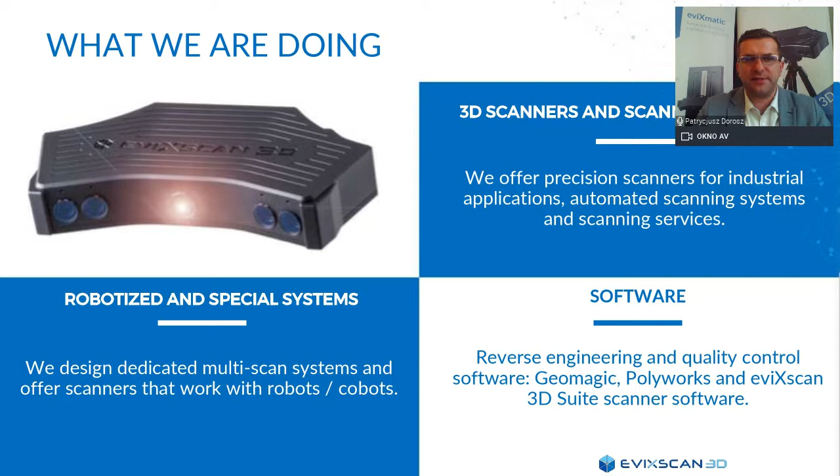What we are doing: we have today three fields of activity. I will not talk in details about our electronic design services and other company activities, but we focus today on the 3D scanning business part. So 3D scanners and 3D scanning services. We offer precision scanners for industrial applications, automated scanning systems, and scanning services. We also offer software, reverse engineering and quality control software Geomagic, and also Polyworks, and eviXscan 3D Suite scanner software, the new release, which was released a couple of weeks ago, called eviXscan 2.7. We also work in robotic fields, and we have robotized and special systems thanks to several partnerships. We design dedicated multi-scan systems and offer scanners that work with robots and cobots.

eviXscan FinePrecision scanner. So we would like to show you today our new product, which was developed thanks to our R&D engineers last weeks and months. And right now we have finally delivered it to the market.

A couple of technical and marketing information about this product. So eviXscan FinePrecision scanner is a device based on the latest generation of highest speed cameras with CMOS matrix and blue light source made in LED technology. So we are using here the blue LED light technology. FinePrecision scanner is a perfect measuring tool for precision mechanics, especially in areas such as production of turbine blades, microcircuits, small injection parts, precise numerically processed elements. It's also very good to use in scanning of implants and prosthetics, watchmaking, jewelry, figures, statues, gaming industry, generally all objects and details that are very small and require precise scanning and measurement due to their size and complexity.

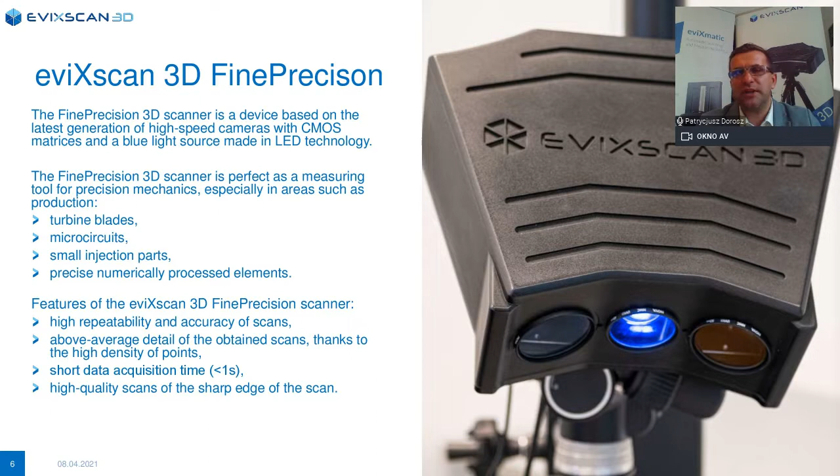Short data acquisition, as I said before, and high quality scans of the sharp edges of the scan. So when we scan some small part or component with this unit, we are getting very sharp and raw scan data from the first place. And inside our software, eviXscan Suite 2.7, we are not using any smoothing functionalities or over-smoothing to polish the edges or the surfaces. So you get the data exactly as you scan it, straight from the first place.

A couple of technical data, specifications and information about this device. As I said before, we are using a blue LED source. The unit is featured with two 8.9 megapixel cameras. Scanning time is 1 second per shot.

Measuring range of this device is 120 by 60 by 45 millimeters. This is the field of view in which we are obtaining the accuracy advertised here, but it doesn't mean this is the maximum or minimum size of the scanning object. After several tests done by our engineers, we are able to get objects which are even 2-3 millimeters in size scanned with high accuracy data.

Maximum object which could be scanned by this unit is up to 30-35, maximum 40 centimeters. Obviously, if we are scanning an object bigger than the measuring range, we need to make a few more scans and merge them afterward inside our software, which is also a fast and automated process.

Density points of this device is 1,233 points per square millimeter, so very high density points and very high precision data. Accuracy, we are achieving up to 6 microns, so it's significantly improved versus the other scanners in our product line, HD Optima and particularly HD Quadro in a range, which have 13 microns of accuracy. Here we are achieving 6 microns.

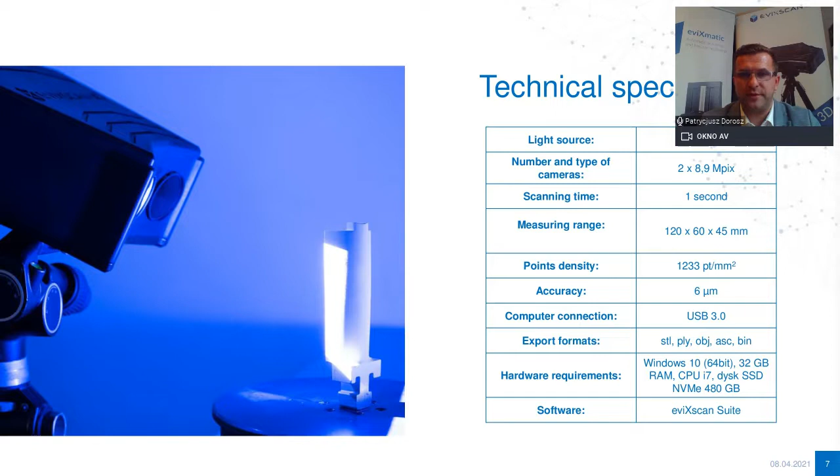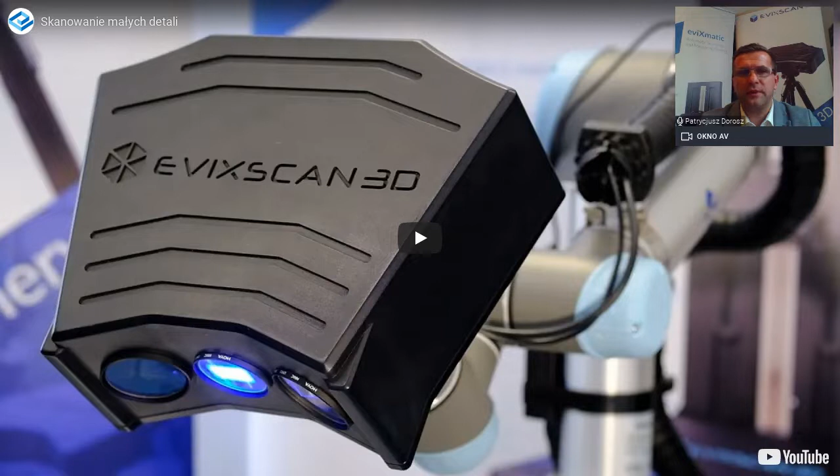Here you will see some very interesting footage of the new scanner, FinePrecision, which is mounted on a universal robot arm. As you know already from the last couple of weeks, we have tightened our collaboration with Universal Robots, and as an off-the-shelf product, our heavy-duty Optima scanner could be implemented, but also FinePrecision can be mounted on the robot arm UR5.

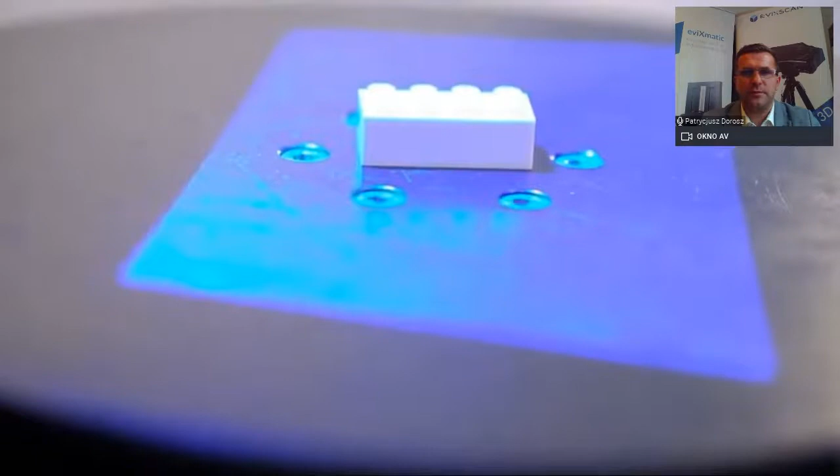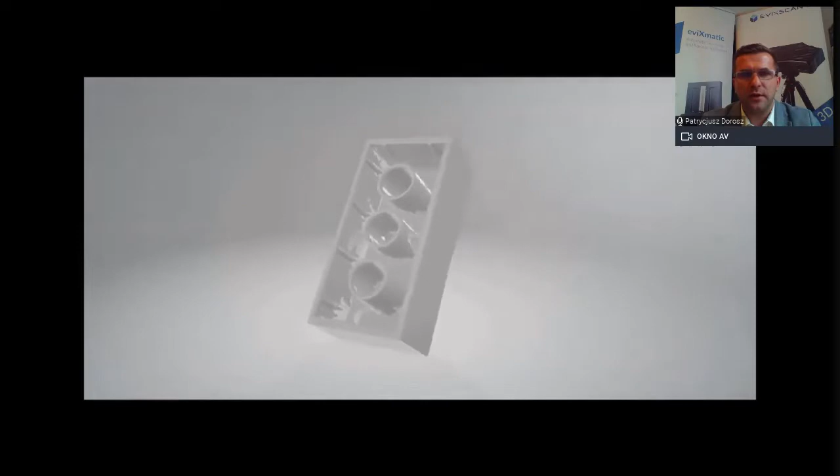Here, particularly, we are scanning an application of a Lego brick from the famous Danish company Lego from Billund. A small Lego brick is put on the 20-kilogram rotary table, which is included with each scanner and system. On the screen, you can see how precise the scanning data is. And here you have the 3D PDF as an STL file, where you can find the details and sharpness of the model, how accurately the Lego brick is scanned by this unit.

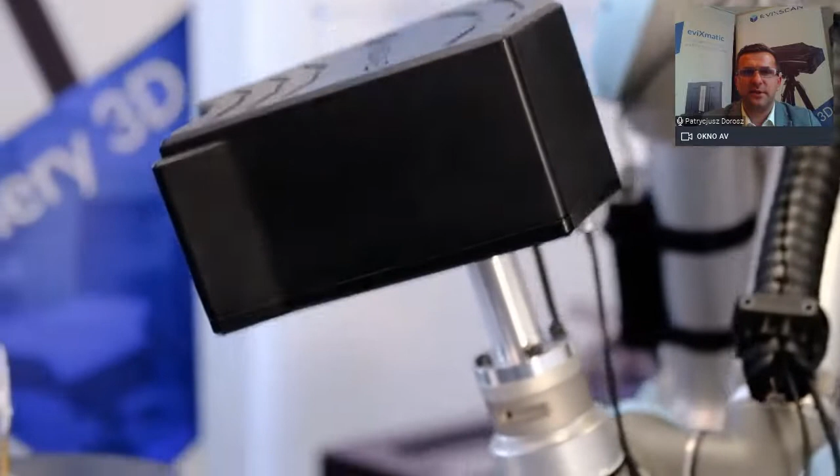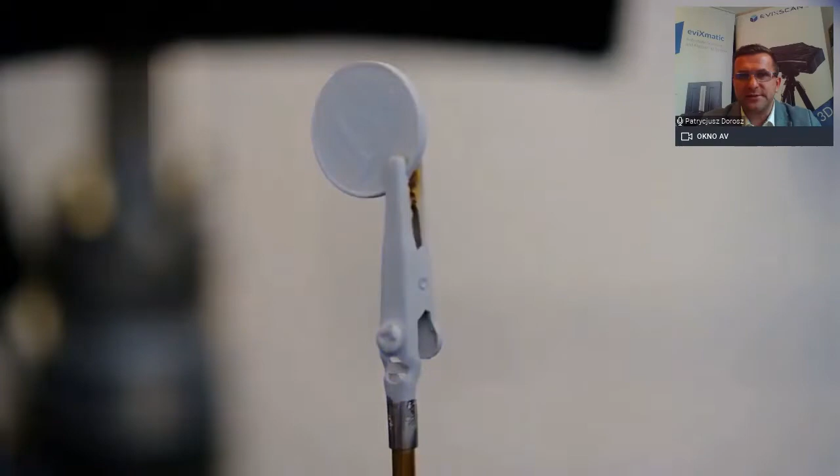The next application, also the same product, same scanner, same robot, is a €1 coin. This is a very good example because a euro coin is very small, very shiny, and has lots of details and engravings on it. We are using here a specific handler to handle the coin, to scan it in a more automatic way without manual user operation, without physically touching and changing the coins. You can see how the scan data looks like and how the STL file looks like after scanning.

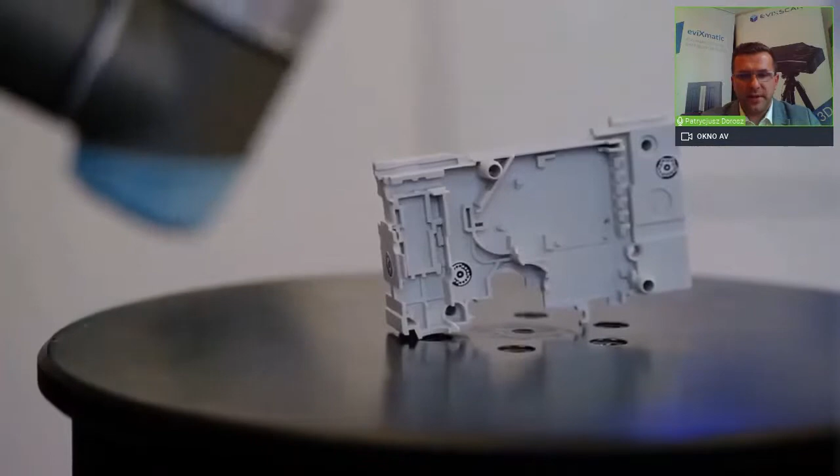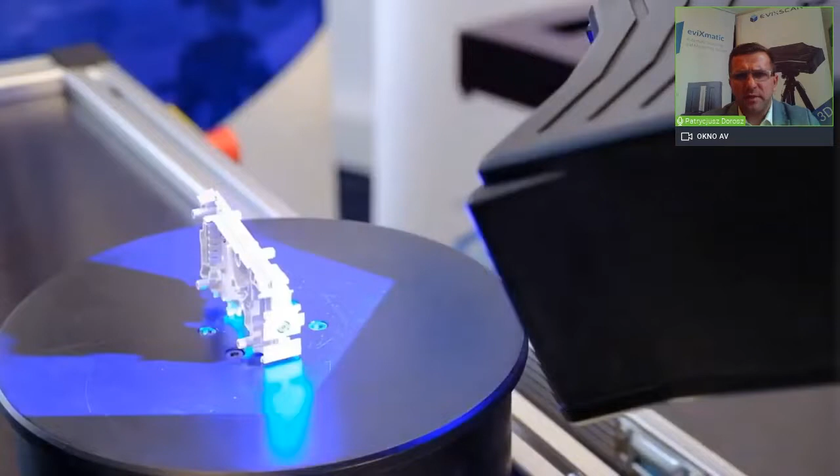The third application is also a small component, a plastic component. It's the housing of a molded case circuit breaker. You can see how complex and complicated the model is. It's a couple of centimeters, 3, 4, 5 centimeters maximum in length. And HD FinePrecision is scanning this object.

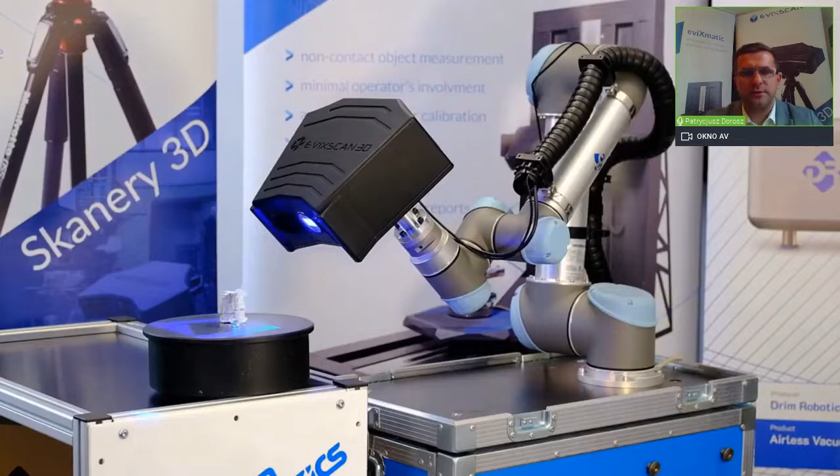You can see how fast our cameras are scanning the object, how fast we expose the blue lines on the object. It's a 1 second scan. Nicely, the UR5 robot is moving the scanner around the model, so you don't have to perform any manual operations or movement. Obviously, the rotary table is helping us a bit too.

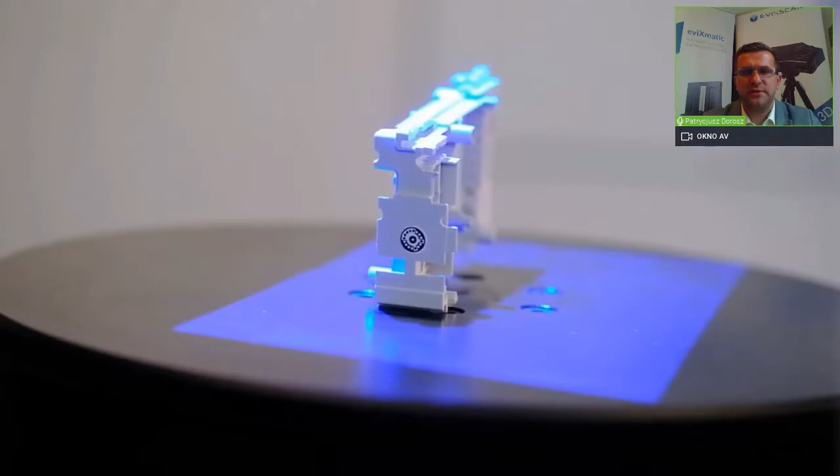On the model, you can see our smallest unique marker, a coded marker, which helps us to more quickly pre-align the scan data to a ready STL file. Here you can see the result as scan data, and here the STL file. Please take a look at the edges and the specific complexity of the model.

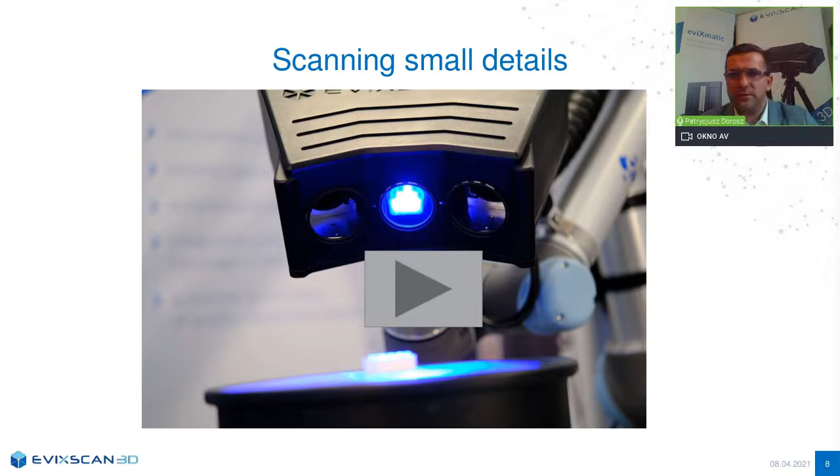All right, so we are behind the movies. Robotized systems.

Now I would give a hand and voice to my colleague from Universal Robots, Karol, who will present you Universal Robots company and the product line and tell a little bit more about this application. So Karol, the stage is yours.

Thank you very much, Patrycjusz. Welcome everyone, whenever you join from, good morning, good afternoon, good evening. I'm pleased to present to you Universal Robots company, which is the biggest cobot manufacturer. During my presentation, I will try to answer the question of how it is possible to turn your business from uncertainty into competitive advantage, and I hope at the end we'll find the answer.

Before we start, let me present myself. My name is Karol Habryka. I work in the regional technical support in Central Eastern Europe, as an application engineer with main responsibility for Poland and Baltics. My background is industrial automation. For many years I've been connected to robotics, and in this field I feel I have the most experience.

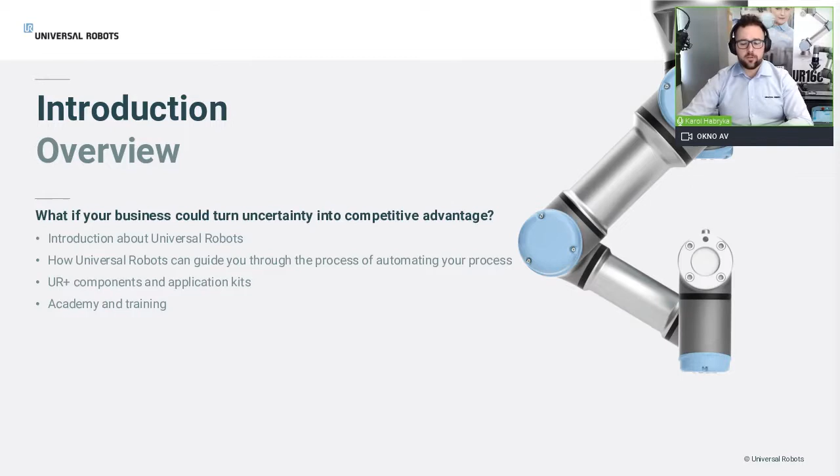Finally, we will talk a bit about the Academy and possible trainings, and how you can build up your competences in terms of using robots in your company.

So let's move to a few words about Universal Robots. Universal Robots started working on developing the collaborative robot arm in 2005, and that year the company was established. The first robot was produced and provided to the market between 2008 and 2009, and this robot is being presented on this slide. For your information, this robot is still working, still put into operation. It's working with a CNC machine. And from that time, we have provided more than 50,000 robots worldwide.

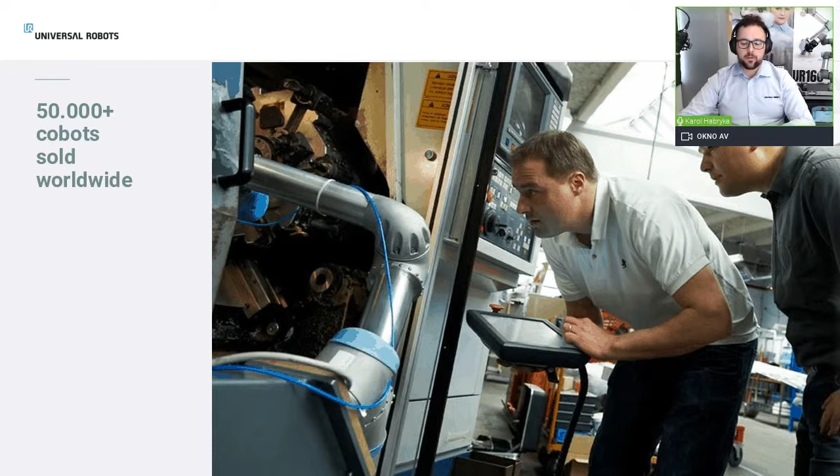During this short period, a bit more than 15 years since the company was established, the number of robots is quite high. Being a collaborative robot manufacturer, it's not possible to avoid comparison to traditional industrial robots. Collaborative robots are also industrial robots, but just to differ from each other, I would like to call one industrial and the second one collaborative.

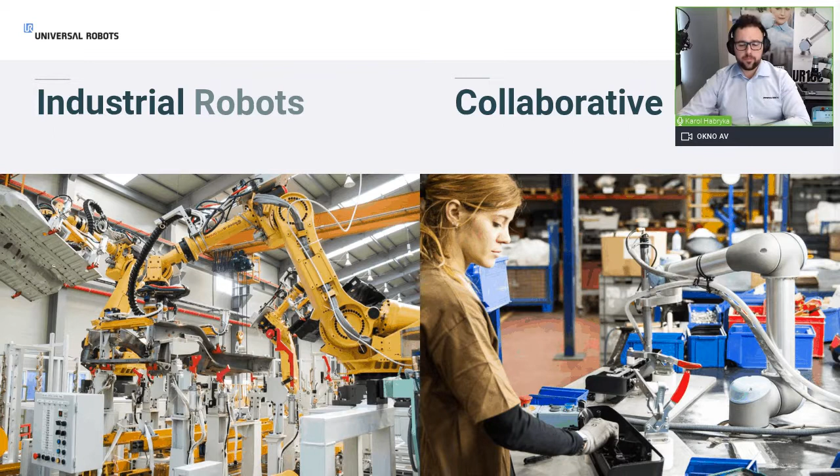On this picture, I want to show you the idea behind traditional industrial automation: serial stations, serial automated lines, usually from automotive. These lines are not really scalable, and any change in production takes time and a lot of commissioning and deployment activities. The idea behind collaborative robots is not only safety, but also the possibility to put a robot in place with less effort, so it can work arm by arm with a human.

I don't really like to talk about the disadvantages of other products, so let's maybe focus on the advantages of collaborative robots, because the idea behind them is to allow users and integrators to set up a robot really fast.

The idea behind is to let anyone program the robot. Also very important is flexible deployment - if we decide to move a robot into another operation, the redeployment time should be as short as possible. Because of the size of the robot arm, the space requirements are really limited.

You can imagine that if you have quite old CNC machines located on your plant one by one, there isn't always space to put an industrial robot between them. With collaborative robots, it's usually doable and much easier to fit into limited space. A properly implemented robot, after performing a risk assessment and CE marking, can finally work side by side with a human, usually without any additional fences.

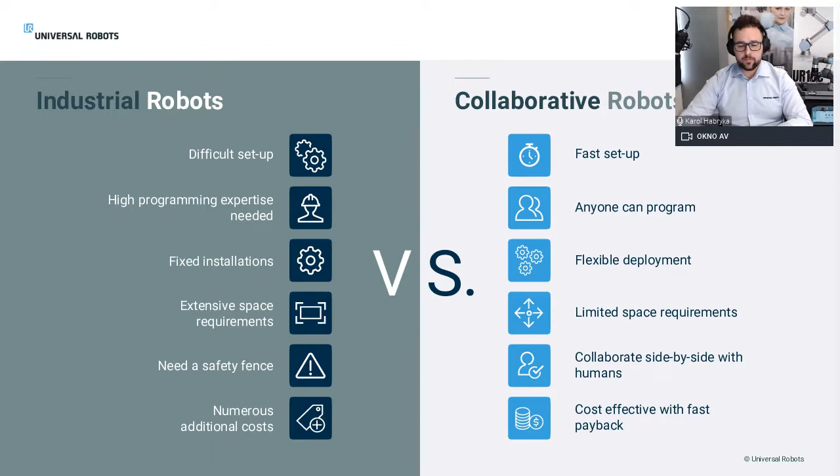In our portfolio, we have four robot sizes. The smallest, UR3e, can automate tasks up to 3 kilos with a range of 500 millimeters. Then we have the UR5e with 5 kilos and 850 millimeters, the UR16e, and the UR10e, where the UR10e is the robot with the widest range in our portfolio, up to 1,300 millimeters.

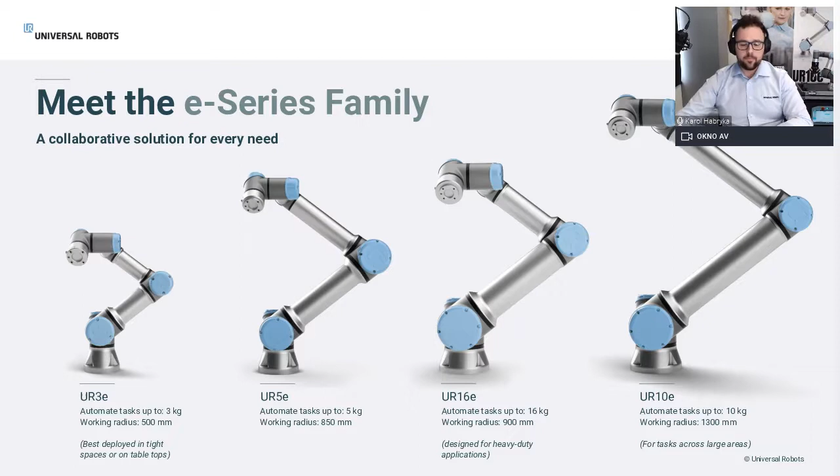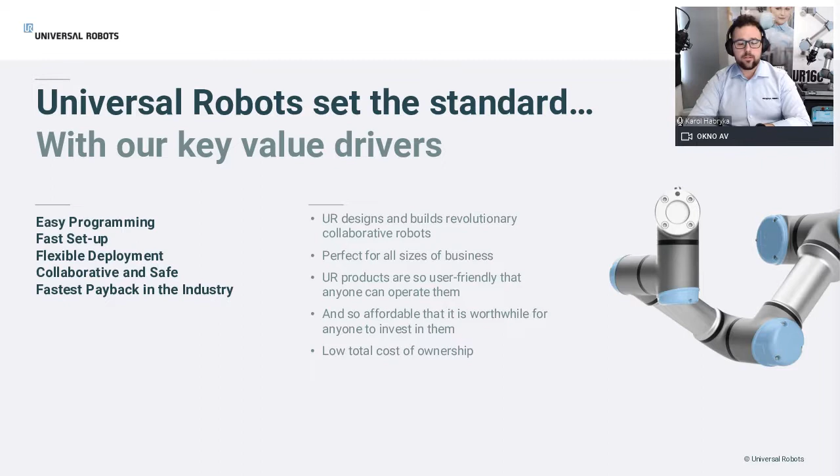Usually when someone talks about collaborative robots, it's understood as just being safe. In fact, Universal Robots defines collaboration as more than just safety. Very important for us is that robots are easy to program, fast to set up, flexible to redeploy, and at the end, collaborative and safe.

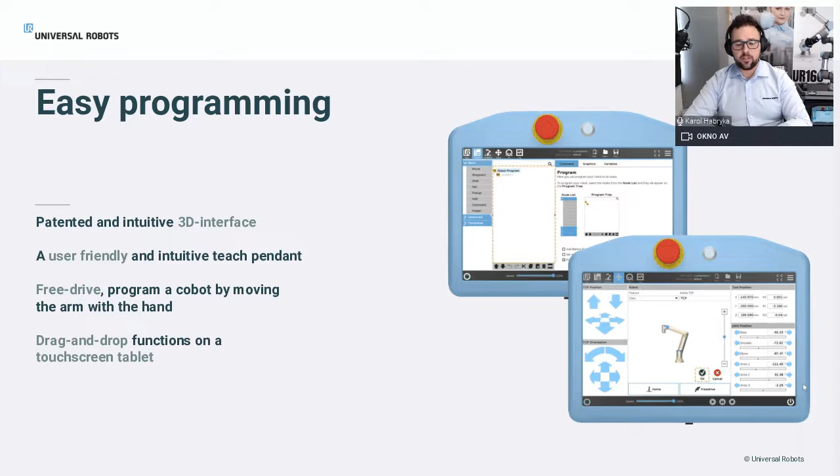To make programming as easy as possible, we have developed an intuitive graphical user interface called Polyscope. Within this software, you are able to program your robot with drag and drop functions on the touch screen, with just one button which enables a free drive functionality, where you can drag your robot with your hand to the desired place and teach the position.

Our robots are fast to set up. It comes in two boxes on one pallet. In one box we have the robot arm, and in the second the controller with teach pendant and all documentation needed. It's just powered with one phase.

And after a really short online training, about which I will be closing my presentation, it's around 1 hour to automate the first task with the robot. Maybe it won't be the task you're interested to automate at your plant, but the first application is really fast to set up.

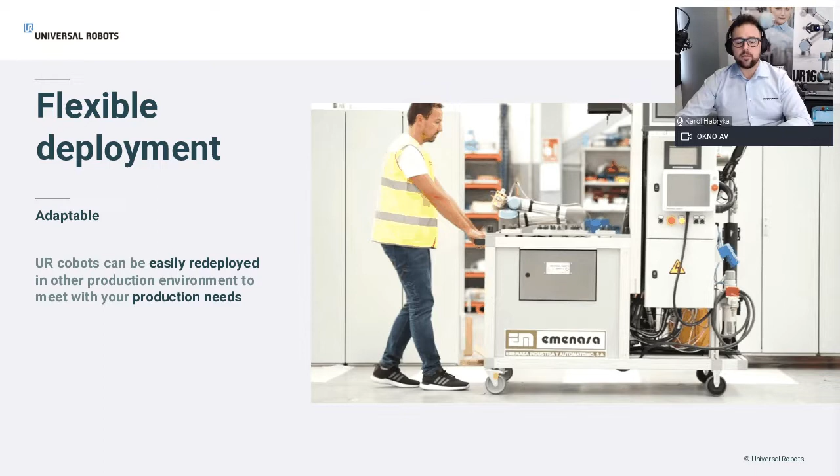Especially during these times where the continuity of production is changing, sometimes we need to think how to automate in a very smart way. Maybe if we have just short production, it can be very important for us to move the robot to another station, and it's what we call flexible deployment and flexible redeployment. As an example, we can see the robot mounted on a mobile station, and it can be moved between lines wherever it's needed. So it gives us a lot of flexibility in our production. It's just to fix the robot in the right place and run the proper product.

Finally, safety. Our robots are equipped with adjustable safety. It means that every one of 17 safety functions, which are certified as Cat3 Performance Level D by an external certification company, are adjustable. So you are able to set the limits, and the robot will take care that these limits are not exceeded.

Finally, our robots are built in full compliance with the standard of how robots should be built. In E-Series, our newest robot generation, we have implemented adjustable stopping time and distance. With these settings, you don't need to measure the stopping time and distance during risk assessment. You just set it and put it into the calculation. It's really useful and easy for performing risk assessment.

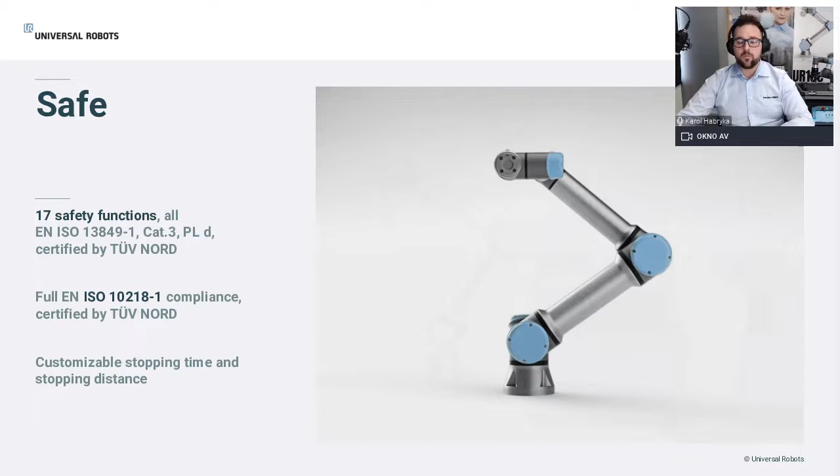So let's move to the topic of how Universal Robots can help you automate your business. Especially during pandemic time, we see an increasing labor gap. Usually it's related to the free movement of people from other countries being really limited, and businesses and plants, especially those relying on temporary labor, have problems.

With cobots and how fast implementation can be, you can minimize your reliance on temporary labor. Finally, usually our production lines are not developed in a way to ensure proper social distance. And again, implementing robots arm by arm with your operators, and moving some of them to other operations, is helping you and your employees keep the proper social distance. And finally, it's also because of the really small footprint our robots have.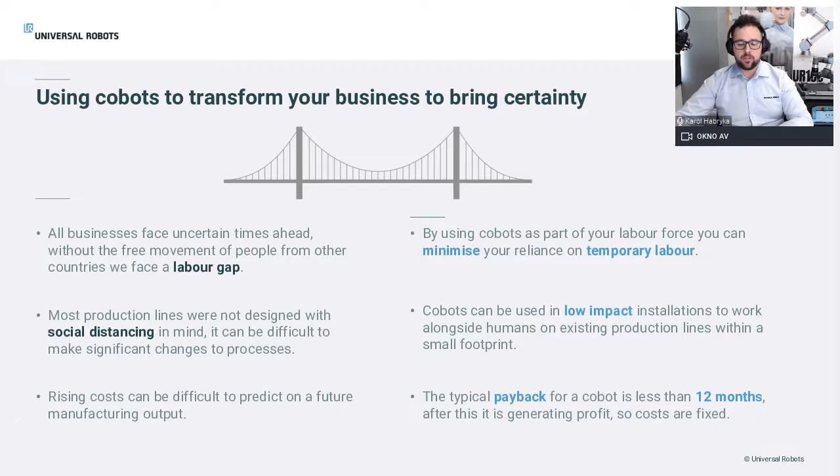And finally, we can move to the part of why we're here, to talk a bit about the Evatronics scanner. As announced before, it's part of our UR Plus program, which we established in 2015. It's a program to certify third-party products which fit our way of automation. It means that these products should be plug and produce: you mount it on or near the robot, you have some software extension on your USB stick, you plug it into the pendant, install the software extension, and it starts to work.

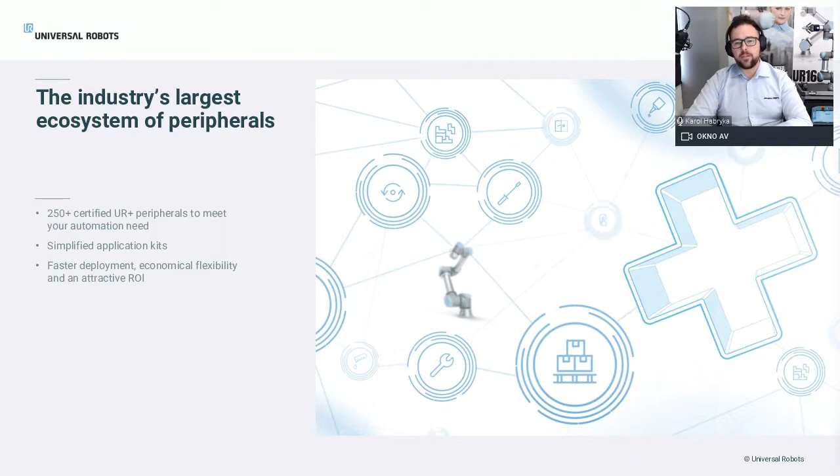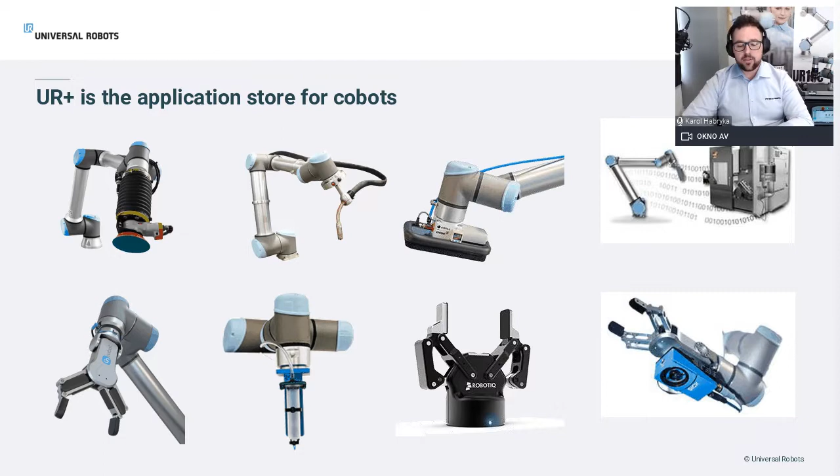At this moment we have more than 250 certified products, simplifying applications so no extra deep knowledge is needed to automate your processes. UR Plus application kits and products can be somehow compared to Google Play or other application stores with software for our mobiles. It's just a store with products for our cobots: tools for polishing, dispensing, welding, communication, vision systems, or, as is actually the topic of this webinar, scanning devices.

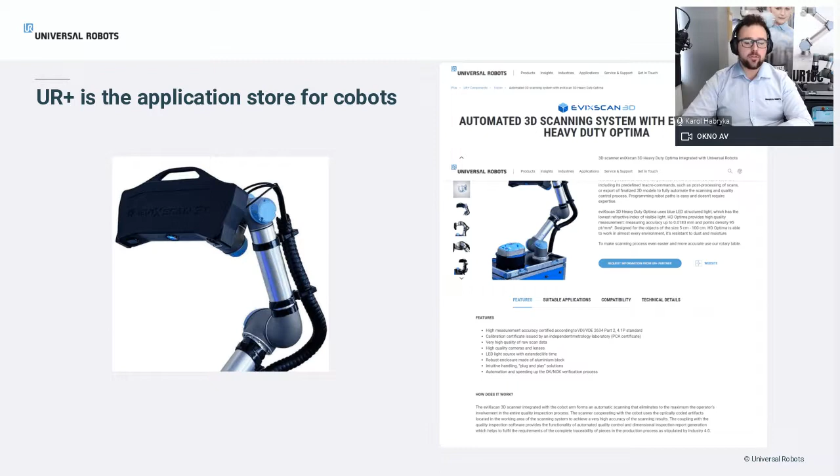I'm pleased to announce that eviXscan is one of the youngest products in our UR Plus portfolio. It's fully certified to work with our robots. Together with Evatronics, the host of this webinar, is one of our certified system integrators, Drim Robotics company, located in Poland.

They also found this program fit to what they can develop, and they bring to our portfolio a vacuum gripper with adjustable vacuum caps. It's a good principle that if there's a need for any device, it can be easily built, and any company can certify the product to cooperate with the robot.

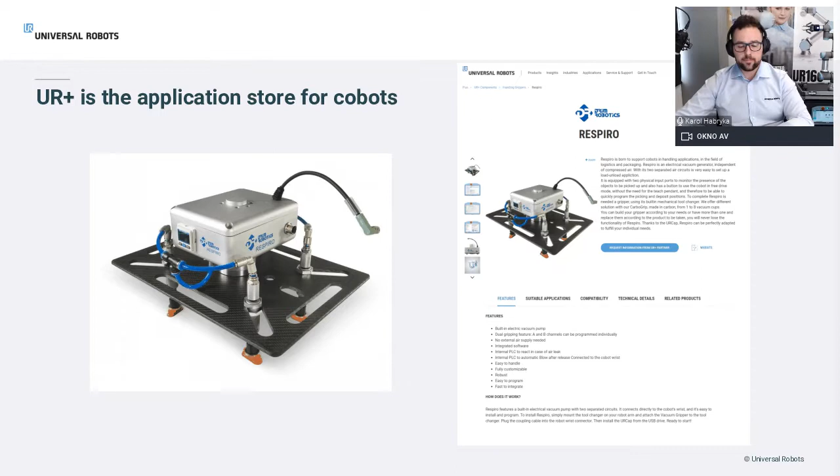For your information, you receive the vacuum gripper with a vacuum generator, you just install some software on the robot, mount the gripper, connect it into the socket on the robot's flange, and it starts to work just like that. It's really useful and fast.

Finally, last but not least, the academy and trainings we are providing. I have the opportunity to invite any of you to start the journey with our robots by attending our free online academy on our website. It contains 3 tracks: core, advanced, and application track. The online academy is free of charge to any user who wants to start building competences in terms of collaborative automation.

The online academy is not just a YouTube video, it's not just a PowerPoint presentation. It's a full multifunctional simulation where you need to take actions, because we believe this way of learning brings the most — it holds your attention so you remember more from the training.

If you're enthusiastic at the end, within our academy website you'll be able to find the nearest in-class trainings. During pandemic times, some of them are provided virtually or in class. The next level is to attend in-class core trainings, which usually take 2 days.

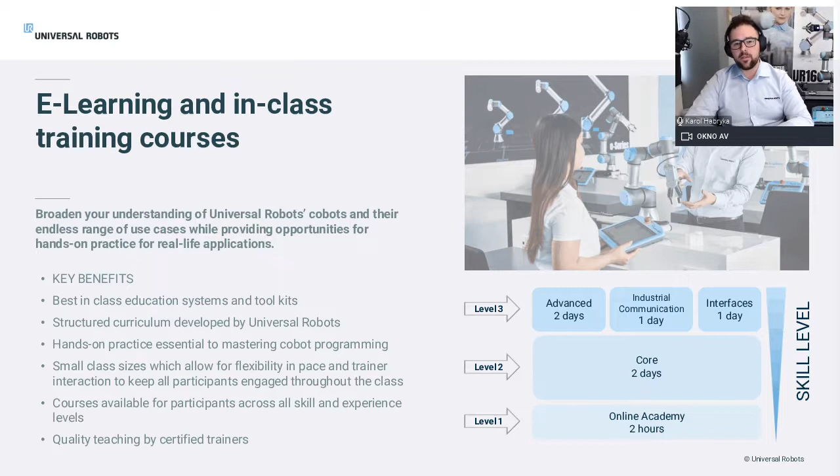Thank you very much, that's all I wanted to share with you. I'm presenting some credentials now. If you have any questions, I'll answer them at the end — feel free to reach out to me by email. And I return the stage to you, Patrycjusz.

Before we continue the presentation, I see two questions from our customers linked to the robot. Karol, may I ask you to answer them right now so we don't lose attention? First question: can the UR robot work properly under hard environment conditions in the middle of a workshop?

That's a very good question, thank you. The relevant question is what we can understand as a hard environment. Our robots are graded with IP54 ingress protection, and a lot of them work in welding and machine tending without any additional protection. But if you're afraid some environment could be harmful to your robot, it's always possible to cover it with a special cover for the robot arm, also available through our UR Plus program. If you navigate to the subpage on our program, or just send me a short question by email, I'll send you the proper product to extend the ingress protection of your robot arm.

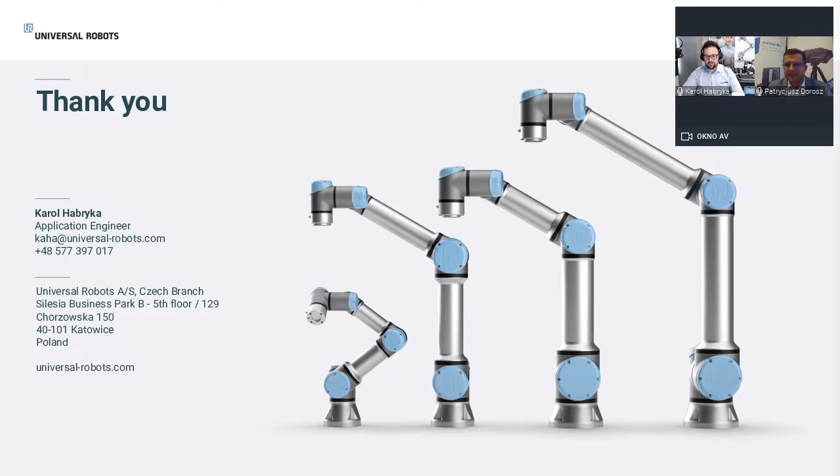That's a great idea. Okay, so we don't see many more particular questions for the robotic part. So thank you, Karol, for now, and let's move further with the presentation.

From our side, from Evatronics, eviXscan 3D, a little bit more about integration with Universal Robots. The UR Plus application set with the eviXscan 3D heavy-duty Optima scanner is UR certified, which guarantees quick and easy system implementation. Automatic 3D quality control: the UR Plus application set is an autonomous measuring station capable of continuous operation in the production process. This solution increases the traceability of measurements and enables the maintenance of high quality of manufactured products.

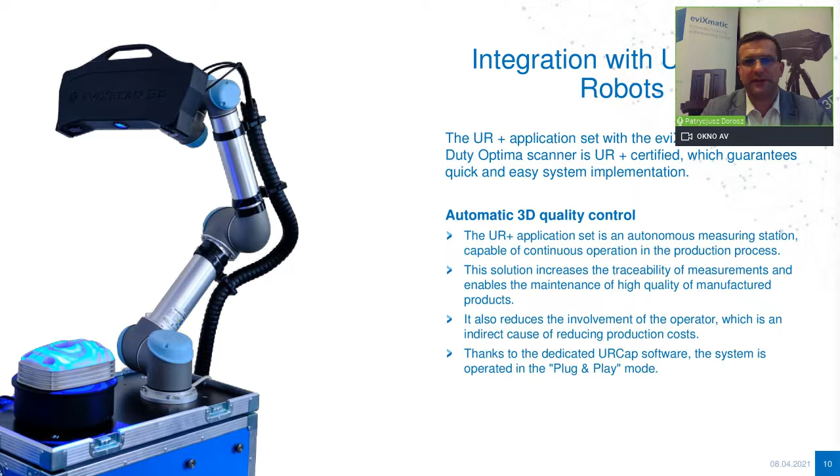What is URCap? Quick start and easy operation. Thanks to the dedicated URCap software, the system is operated in plug-and-play mode. Programming the robot's work path is very intuitive and does not require expert knowledge. The user can easily parameterize subsequent scans in single scan or HDR high dynamic range mode. It's also possible to use the full potential of the eviXscan 3D suite software, including its predefined macro commands, such as post-processing of scans or export of finalized 3D models, in a fully autonomous eviXscan quality control process.

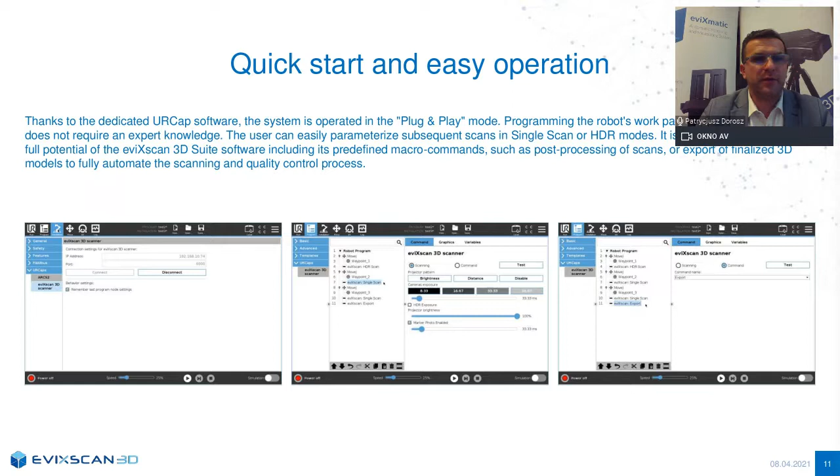A few words about Drim Robotics company. As you are aware from the beginning of the presentation, we at Evatronix are responsible for the eviXscan 3D products. There is the Universal Robot presentation run by Carol, and there is also our third partner, Drim Robotics, which are integrators of Universal Robot and accessory providers.

Drim Robotics is an integrator and programmer of industrial and collaborative robots since 2013 in Poland. Since 2018, they have been officially certified as an integrator of Universal Robot. The main goal of Drim Robotics is process automation and production optimization. The manufacturer, Drim Robotics, produces a vacuum generator and protective covers for teach pendants for popular robots.

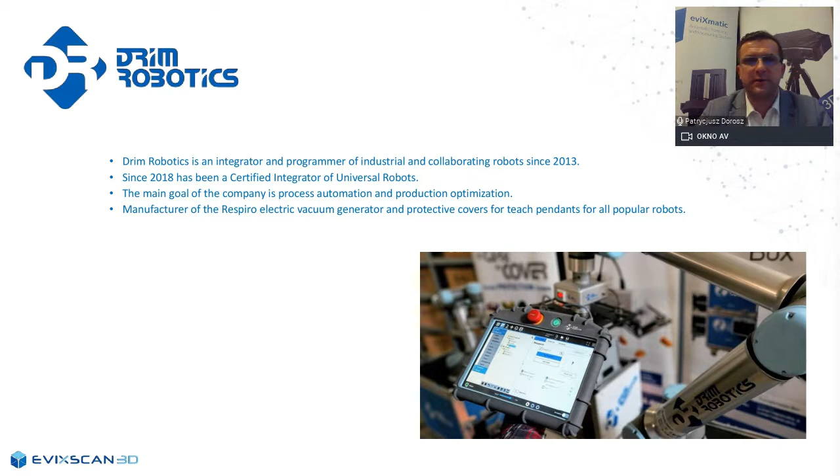What is Respiro? In a minute you will see a movie of how this application works, but explaining a bit more in detail: Respiro is an electric vacuum generator, which in this case is used to take elements from our vibratory feeder on the production line and place them on the eviXmatic table. eviXmatic, for those who are not aware, is our automated product from about two years ago. We will tell a little bit more about this application later.

Respiro's most important feature is independence from compressed air. As a result, we have a fully autonomous control measurement station that can operate in places where there is no compressed air.

CarboGrip is another accessory from Drim Robotics' portfolio. CarboGrip is a carbon plate attached to the Respiro, and it allows any configuration of suction cups and carrying a wide variety of elements. Such a set of Respiro and CarboGrip can carry details weighing up to almost 20 kilograms.

As you can see, the robot is mounted on transport boxes. Below the robot you can see the blue box, called T-box. It is also a product of Drim Robotics, a transport case for safe storage of cobots. Once set up, the T-box provides a stable base for each robot and its operation. Just remove the top cover and the robot is ready to work on site.

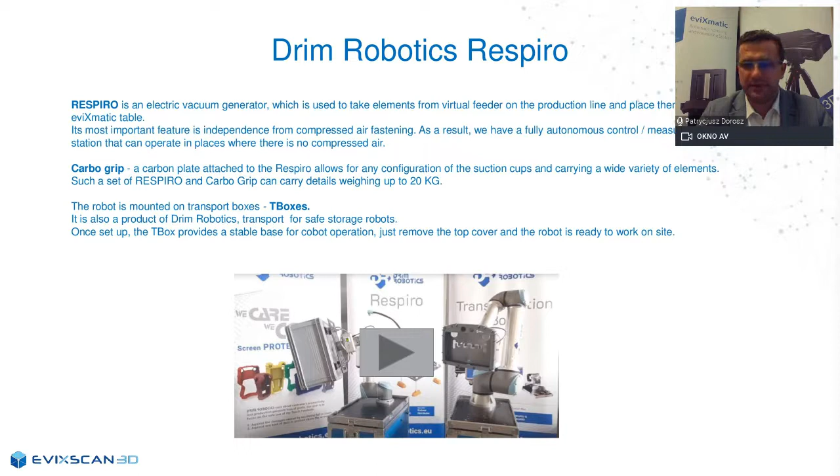Right now we will show you the movie.

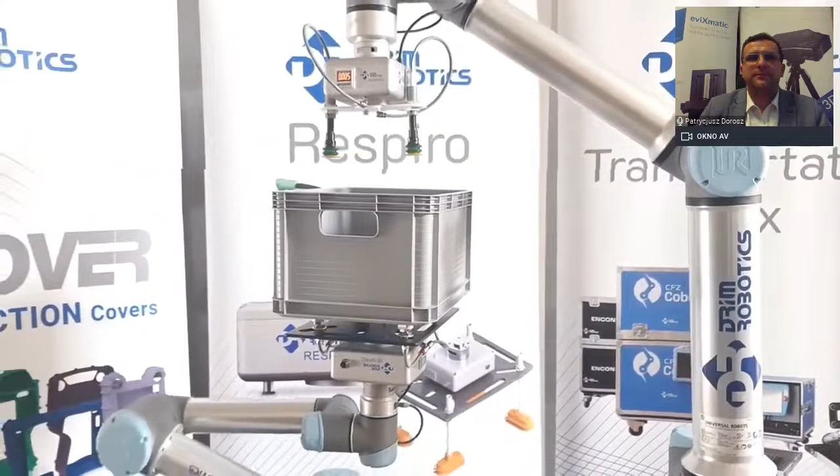And we will have another movie, which we will play in a minute. I would like to first explain what it is.

It's a system for automatic quality control on the production line. On the screen you can see our eviXmatic product, which is an automated 4-axis scanning system with two lifts, a horizontal and a vertical lift. On the upper lift, two scanners can be mounted, either heavy-duty Quadro or heavy-duty Optima scanners, so they can be lifted up and down and change the angle of the field of view.

Whilst on the bottom lift there is a rotary table, which moves front and backwards with 360-degree rotation. This system is dedicated to automatically and faster scan the objects. It doesn't require calibration because it's a pre-calibrated automated system. On the rotary table, you can see also our magnetic cubes on which are mounted sticked coded targets, to help us faster align scan data to the ready STL file.

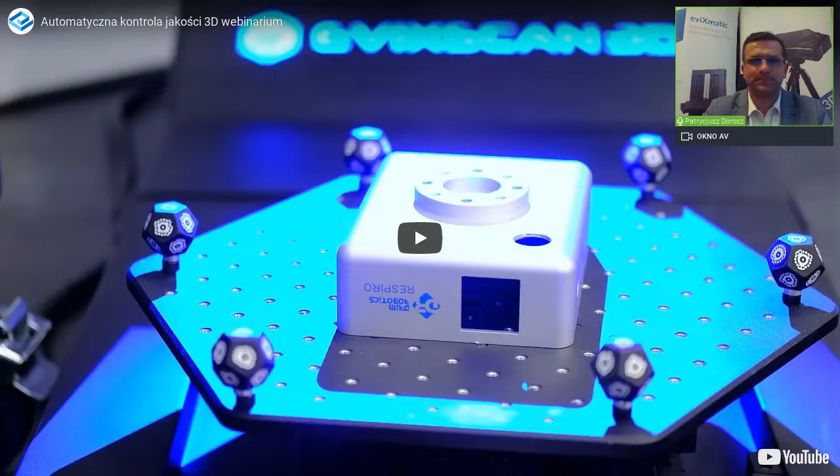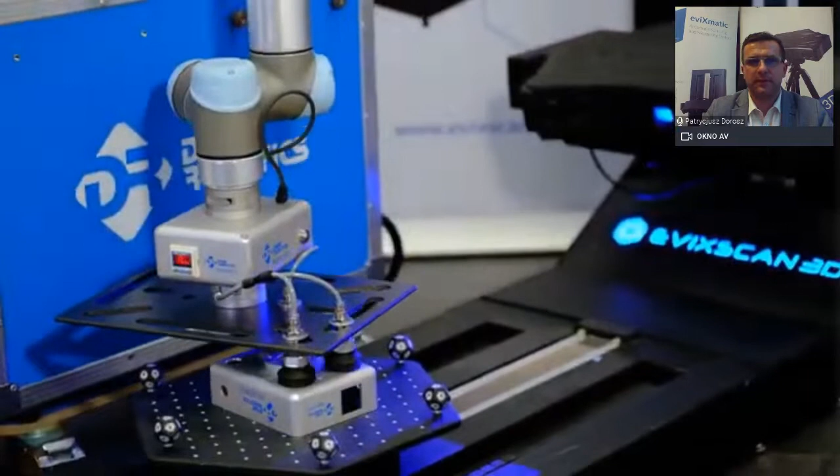And as I said, you can see how the Respiro picks up the part. Thanks to the robot, obviously, it's put on the eviXmatic table, the robot is moving back to its position, and eviXmatic is starting the scanning procedure.

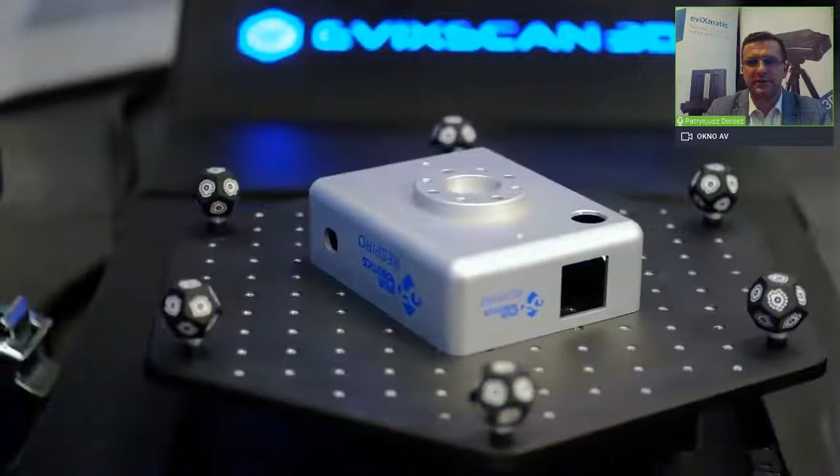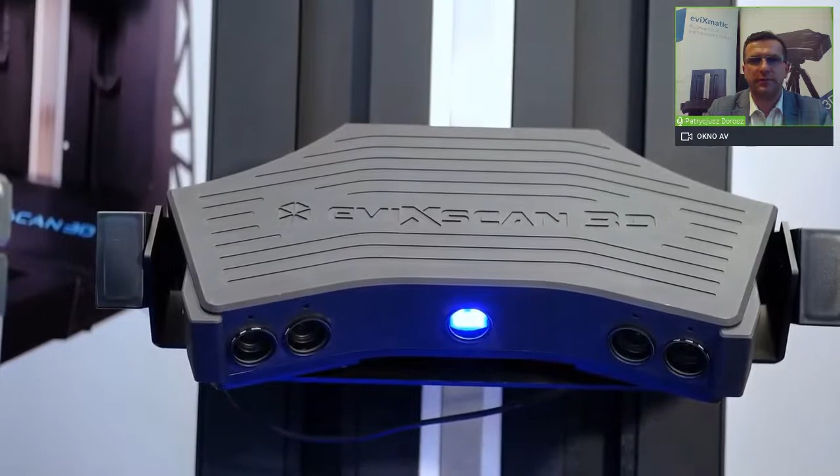The heavy-duty quadro scanner in this case is moving down to be a little bit closer to the object and dive with a bit more deeper angle to scan the part from different angles. Heavy-duty quadro is a 4-camera system with 2 scanning ranges, so you can swap between the ranges automatically by 1 click in our software.

Now the robot again picks up the part and puts it back on the production line. And the robot is taking another part, let's say part number 2 or number 5, putting it back again on the eviXmatic rotary table, and we start the process. It's a very repeatable process.

Operation of the system is very easy. We can call it almost a plug-and-play system. It's very easy to use even by a not super experienced, high-skilled operator.

Okay, so on my behalf, that's everything we would like to present you today in terms of our new product, new FinePrecision scanner, along with an automatized solution, along with universal robots and Drim Robotics.

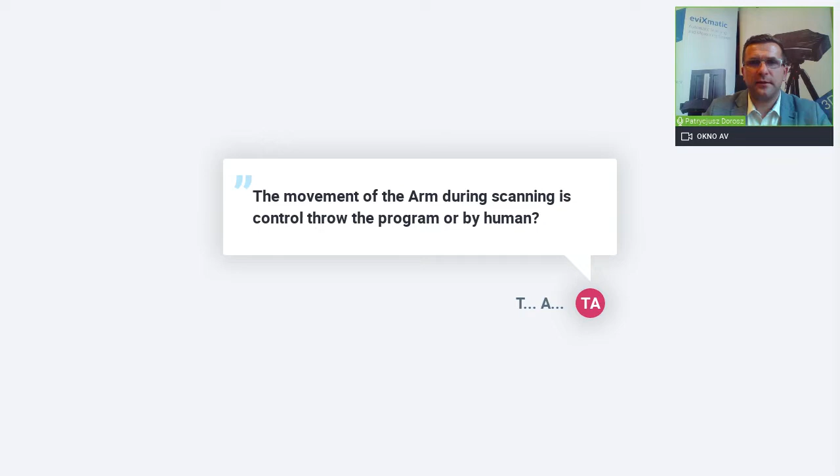The movement of the arm during scanning - is it controlled through the program or by a human? I guess this question relates to the robot. Let me reconnect with Carol. Carol, are you with us still? Yes, I'm here. We have a question related to the robotic arm, can you reply please? It's a similar question to the one from the Polish webinar: during scanning the robot is stable, it's programmed positions where you bring the robot arm with the scanner, and then you scan. The robot is stationary during that procedure. I hope that answers what was asked.

During the morning seminar for the Polish market we also had a very good question, which I'll raise here: can we scan objects in movement? This is a very commonly asked, very good question, and unfortunately not. The scanning technology, like handheld scanning, tripod-mounted, or even laser scanning, cannot scan objects that are in movement. The object or part, whether on a production line or even a car moving slowly, needs to stop for a couple of seconds so we are able to capture and scan it. Cameras need to see the object in a full-stop position. The same applies if the camera is mounted on a robot - it works both ways. Object and camera need to be stationary, so the robot arm needs to stop at some moment to perform the scan.